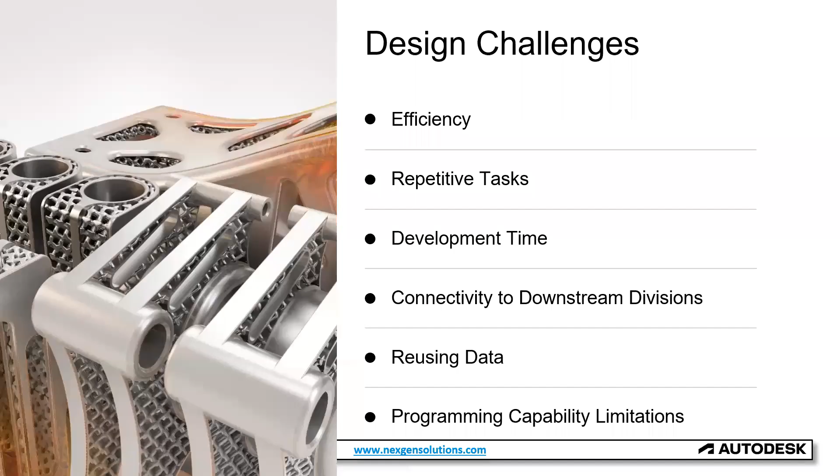Let's take a look at some of the design challenges we deal with in the engineering world. Efficiency is obviously a big one - how do we make our designs and get product to market faster?

There are always setbacks here and there. We might go down one path and decide that doesn't work, so let's try a different route. But there's a lot of inefficiencies in our workflow a lot of times, so we're going to try to get better at that.

We talk about repetitive tasks, things that maybe aren't time well spent by the engineers and designers. Usually they're fairly high paid positions, and we want that team working on things that are value added, not just these repetitive things.

So development time is always a challenge - again, getting product to market faster. A lot of these are kind of connected between efficiency and development time.

We kind of touch on the same types of areas there, but we're always looking to get our products designed faster and at higher quality in a quicker time.

Using tools in Inventor like FEA are always a great way to do that. Nastran is now built in, so we can rule out certain designs faster. There are a lot of tools in there that can help with that.

And iLogic is one of those tools we're going to take a look at here. We're going to do a little bit of demonstration on that as well, just here in a second.

Obviously connectivity to downstream divisions matters - we want transparency between sales and service. Not just on the design side, those different departments need to be able to communicate information back and forth.

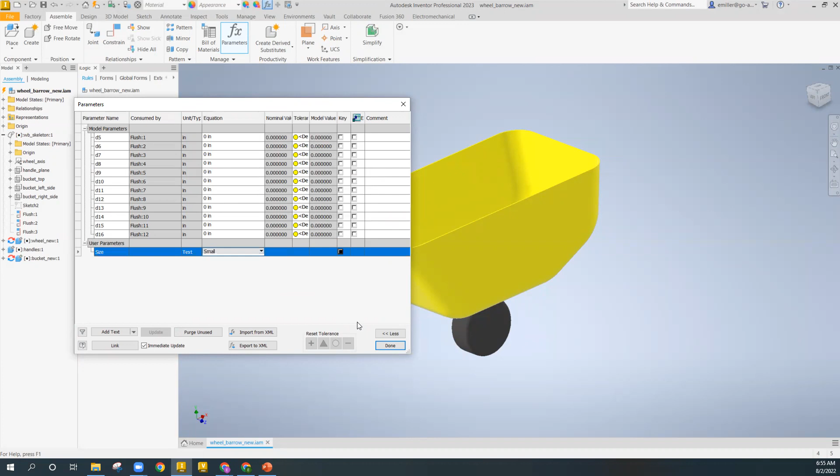Now we have that as a parameter that we can use to drive some dimensions. I'm going to close out of that, and I'm going to open up the skeleton now.

So we'll see, okay, what dimension or dimensions do we want to be driven by this. If I go now to the parameters here, we can see what the skeleton looks like. We've got some sketches, some planes, but you can kind of see the outline of what the wheelbarrow might look like, even though we don't have any geometry typically in a skeleton file. But one of the dimensions I'm going to be concerned about with these different sizes is this bucket, the dimension used to create the bucket top.

That's the top plane controlling the overall height of this thing. Obviously with dimensions in Inventor, we start at D0, go to D1, D2, D3, but you can change these. You don't have to leave them at those symbols, which don't make as much sense or have as much intelligence built in. So I'm just going to call this one height - it'll make it easier to see that dimension and know what it means. You can see it's starting at 36 inches right now. I'm going to hit done on that one.

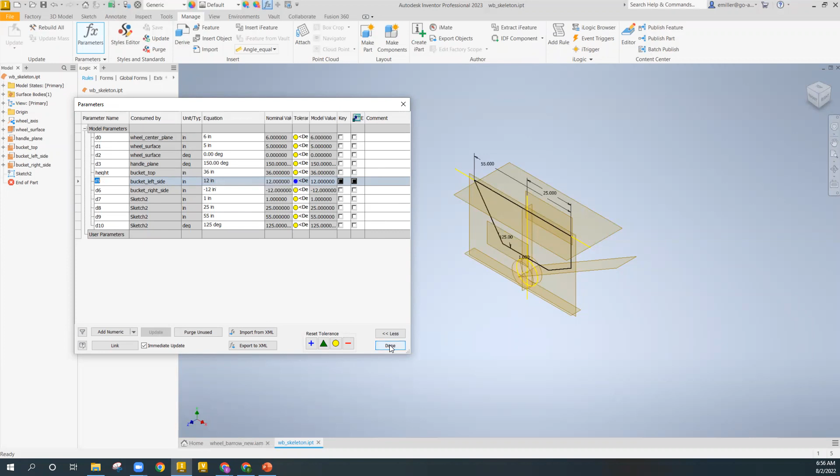So we want to make sure we pull that one in, or utilize that, in my iLogic design. I'm going to bounce back to the wheelbarrow overall assembly, and I'm on the iLogic rules side now. We're going to right-click in here and just start adding a rule to build this. So rule name - we're going to call this one change size and color.

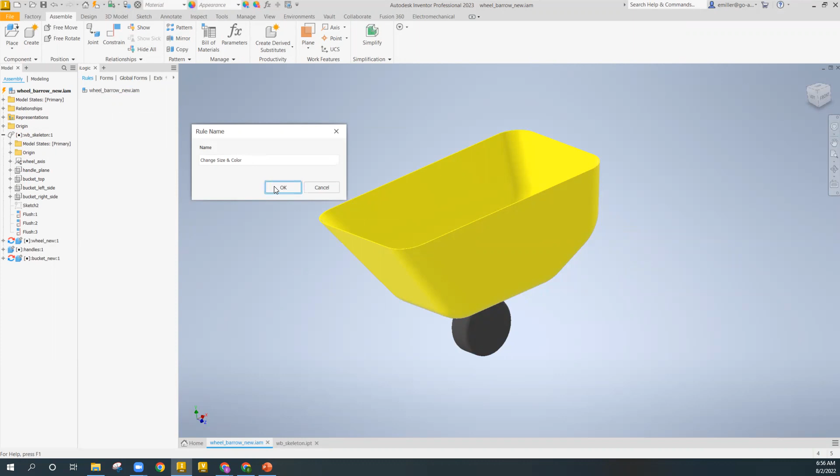So we're going to put both of these in. You could break this up into two different rules if you'd like. I'm going to put them both in the same one, again for the sake of simplicity here.

Okay, so we're waiting for that to pop up. Here's the interface for using iLogic. You can see on the left side we've got all these different properties, parameters, features, relationships, even some advanced API items down in the bottom. And then also we can create our own custom snippets as well.

We call these snippets over here. Basically the idea is we grab one of these, double-click on it, and it drops it over into the right, which is your area for code. Once you start building this, you'll realize it ends up being kind of code, but we don't really have to know where all the commas should go, things like that. There are definitely some things we have to be careful about, like when quotes are required, but compared to typing all this code out from scratch, it's way easier.

Anybody that's done some programming in the past knows if you have a comma in the wrong spot, a space in the wrong spot, it can cause lots of delays and you scratch your head wondering where the issue is. But it's a little bit better situation in here than trying to do that.

Up on the top, we can see that we've got a wheelbarrow new assembly. And if I scroll down, here's my three components, in addition to the skeleton. Expanding these out, we can see these are my model parameters. If I just scroll down a little bit, there's the height parameter.

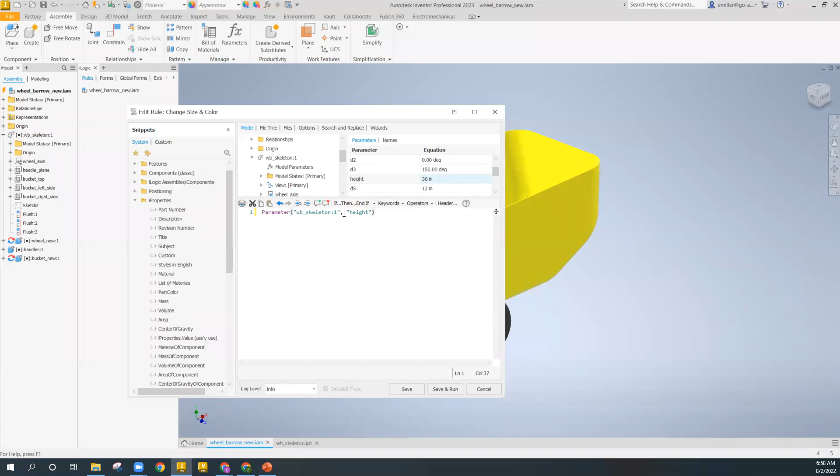So if I just double-click on that here, it just drops it in. As you can see, it's bringing in the parameter, with the parentheses in there to the appropriate component, and then which parameter it is - its height.

We can set that equal to something. I'm going to delete that out of there, but I just wanted to show that when you double click on it, it just drops the appropriate syntax down into the code area.

Down below that, there's some options too. We've got our if, then, end if, else if statements for adding conditional type statements. We've also got some keywords. One I like to use is case. When we use select case, it allows us to build these different options, so each case is a different option, and you can have that option, whether it be a parameter or dimension, drive other things based on each case. That's what we're going to use in the wheelbarrow project we're working on now. There's also a bunch of different operators and a few other options within that heading.

Okay, so let's start building this thing. The first thing is we're going to start with select case up on top, so I'm going to click that keyword. The case we're going to use is size, so let's go find our size parameter. If we go up here, that's under the wheelbarrow, that's a user parameter. I'm just going to double click on that - if you look at it, that's the small, large. So select case is going to be size. You're just saying what category we're going to start building these different cases with.

So I'm going to enter, and underneath that, now we're going to say what our case is going to be. Let's say this case equals, and this is one of those scenarios where we do want to use the quotes. I should mention too, capitalization is fairly important with these. If we're using parameters to drive things, make sure, in this case, I used a capital S for small, capital L for large - we want to make sure we put those in correctly. So it's case small initially.

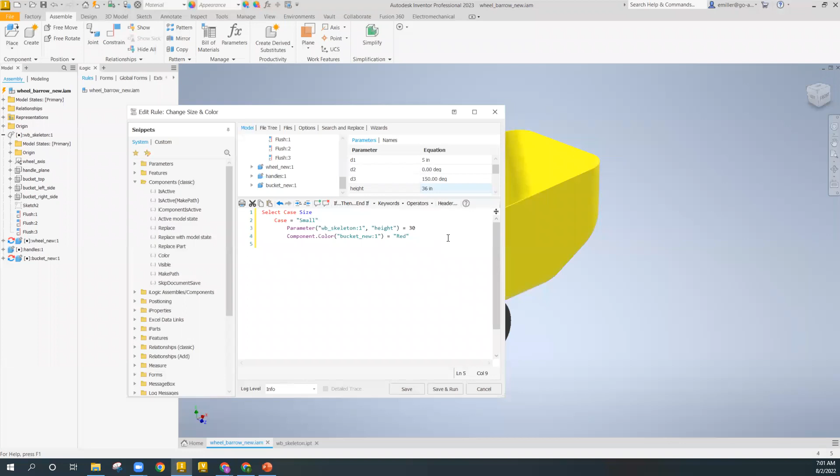All right, so we're going to duplicate the same thing. We can actually just copy those top three here. Let's copy those, come down, and we'll paste those in. Oh, I guess I should have went back one more level - there we go. So now case, and we'll just update this to what the large situation is going to be. We'll go case equals large. Then we want the height to be 40, and we want the color to be, let's say, green.

Now, one of the things - we could hit save and run here, but with the select case, it does have to end that argument, so we're going to hit enter. This is one of those things you don't have to always remember. If you try to save and run - let me just do it once here - save and run, it just tells us that select case must end with the matching end select.

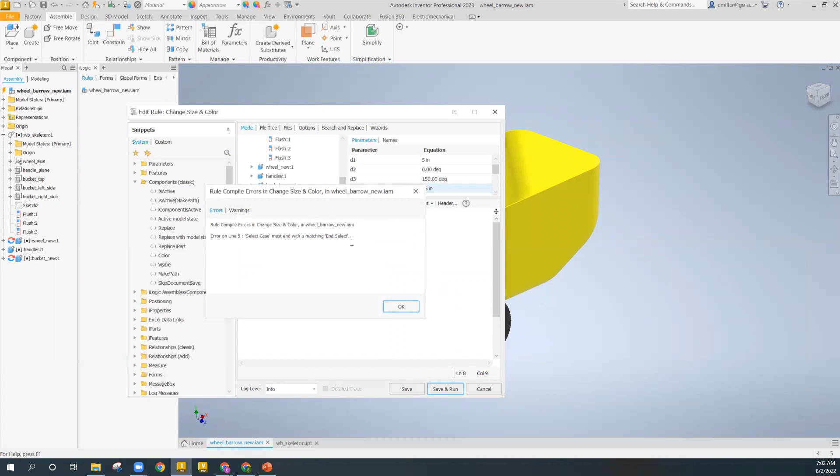So again, it's not something we always have to remember - it'll tell us if there's an issue. So at the bottom of that, we enter 'end select,' that's in the keywords. Indenting like that helps organize your arguments a little bit. You don't always have to do that, but I like it so it looks more like paragraph form.

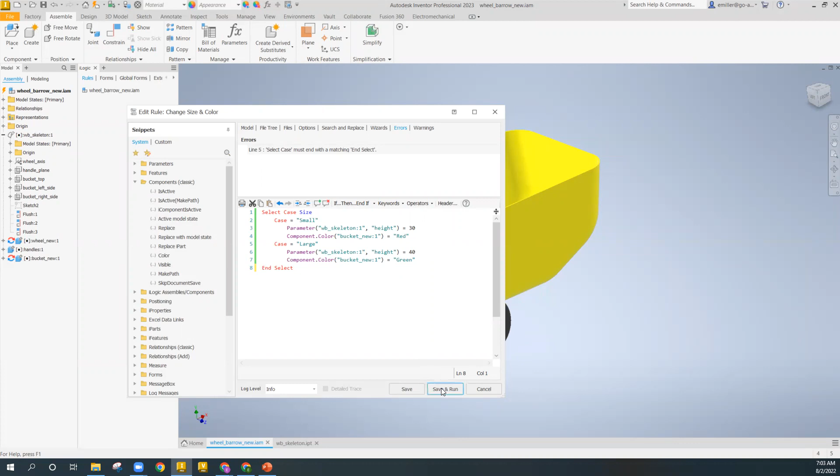Now let's go save and run. And there we go, it updated it. Notice the orange lightning bolt is up there - it still needs to update the dimension, so I'm just going to hit that. And now it went to our smaller, shorter wheelbarrow.

We can test this out by going to the parameters here and going from small to large. And now it's updating - I'm a little surprised I got this to work the first time. I'm not a coder, but hopefully this shows how utilizing iLogic can be fairly straightforward, using language that designers and engineers are used to.

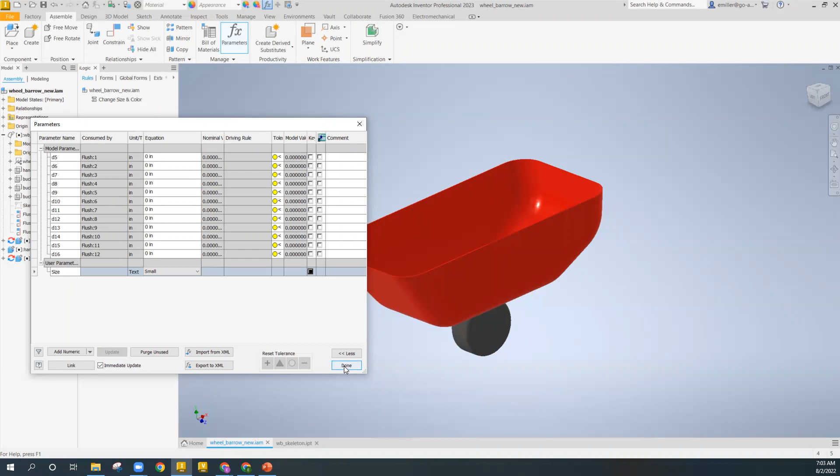All right, the last thing I want to show you, or maybe not the last thing, is how to build a form to drive these. So let's go to the form side. We'll go to add form.

Okay, so we got our form editor, and you can see the form build over here on the right as you start to develop these. I'm going to change the name of the form - we'll click on the label here and call this 'change wheelbarrow size.' If I click off that, you can see I changed the name of my form over here.

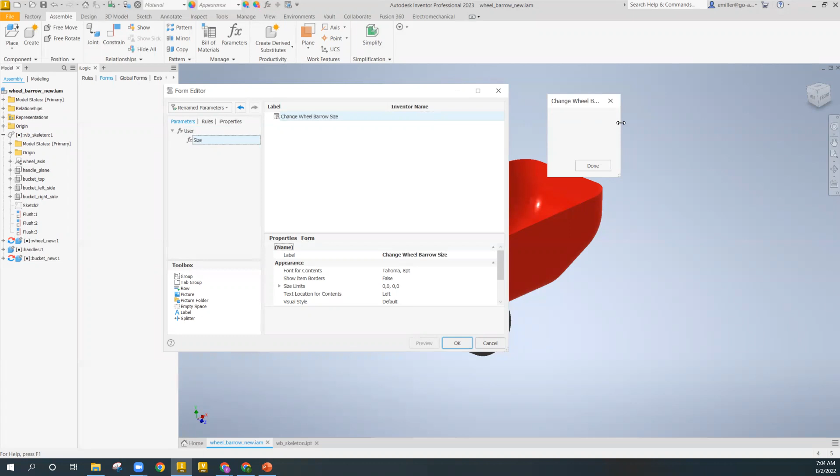We can see different parameters, rules, and iProperties that we can drag over and add to the form. I'm just going to drag this size parameter over, and we can give it a different name, because technically we're only changing the bucket size. So I'll go 'bucket size' there. If you click off that, you can see the build - on our form now we can see it's small or large. So let's hit OK here.

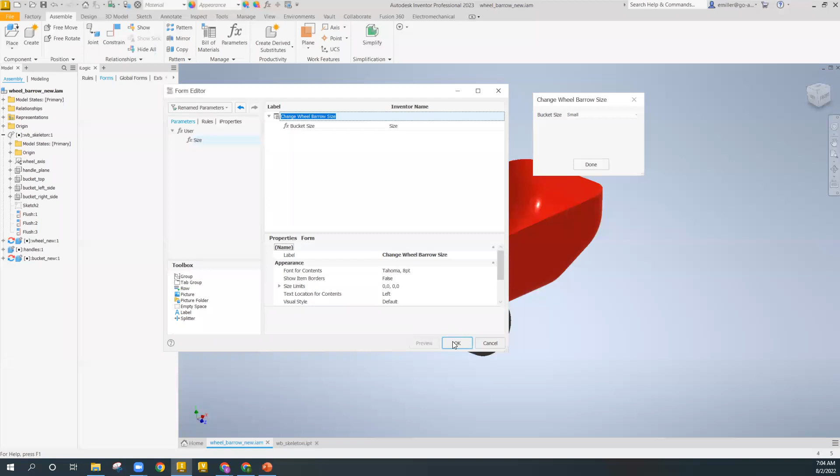Again, this is pretty simple, but you can build some complex forms with all the different information available there. So now if I click on my form, 'change wheelbarrow size,' we'll change bucket size to large, and we can use this to control the shape and the color of our bucket.

The nice thing about building forms and iLogic rules is that we can take this to the next level. Not only on the design side can this be utilized to make these different options faster, but we can also extend it off to, say, sales.

One of the tools that's out there now - you may have heard of Configurator 360 in the past, that's getting phased out. Autodesk is focusing now on the Forge development platform, which is a cloud-based development tool. With Forge, we can create a design automation configurator for Inventor assemblies using iLogic.

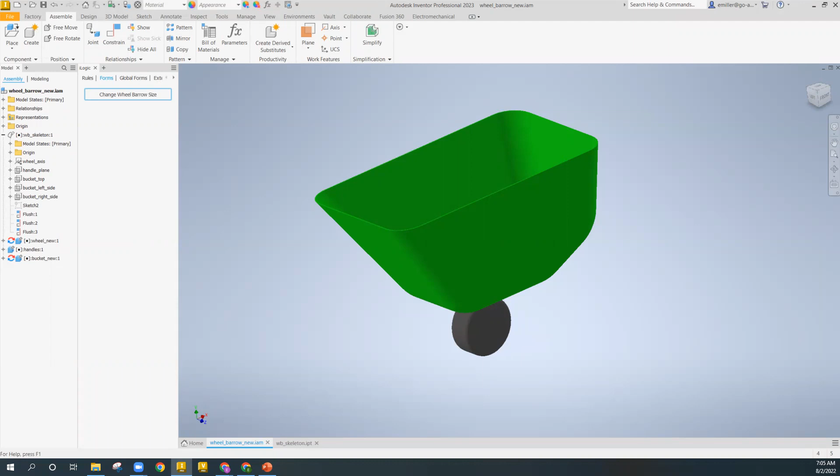It doesn't have to be an assembly - I guess it can be a part and drawings as well. So let me pop that open quick so you can see what this might look like.

So here is the site - there's a demo site out there for this. Anybody can go check it out and test this out. It's Inventor config demo autodesk.io. There's just a couple projects out here, but you can actually go get the code for this and build it on your own local workstation and test it out with your own projects. So that's the cool thing now - this code is available to anybody.

You do need a Forge account, so there's cloud credits that get utilized to build these models, but it's pretty inexpensive if you ask me - I think it's definitely worth the try, and worth looking into. I think if you can get this in front of a customer to show a web-based configurator like this, you can really turn some heads and build more sales.

All right, so let's just go through what this is - this is basically pulling in the different parameters that we want in iLogic.

So we're driving the size and this wheel. We've got the wheel size, number of spokes, you can have slots in the spokes if you want, different wheel finish, brake material. But you just look at it, and actually the total price is generated from these other options. That just kind of kicks out what the price is going to be. So just think about having that in front of a customer.

They can see the price right away. Obviously, it's kind of like some of those websites where you can go build a car or build a pontoon, and it shows you what it costs. So this is kind of the same type of approach you can use with your own products within Inventor.

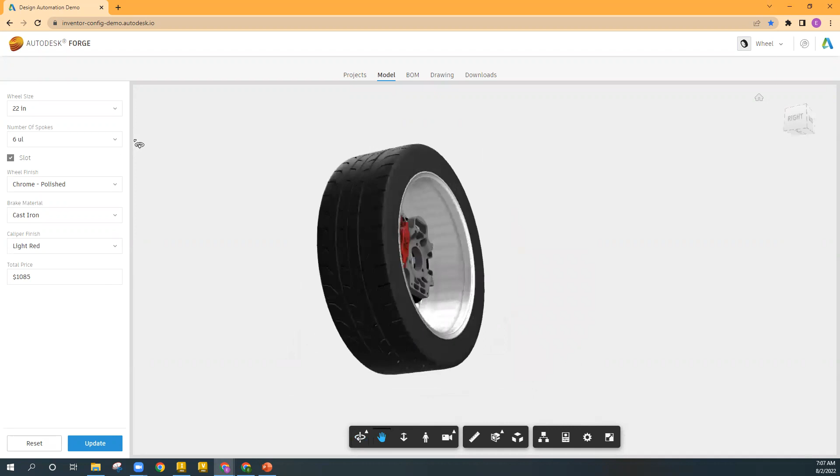Now the outputs you can see up on top, we can look at different models. We can actually rotate this thing around, take a look at it, explode the view, things like that. So this is kind of that cloud-based viewer that's being utilized now in a lot of different areas within Autodesk tools. We can look at bill of material, drawings, and then download the actual part files, create quotes, things like that. So it's pretty neat.

Let's just look at what it takes. Now some of these, obviously, if they're complex assemblies, it utilizes the cloud environment from Autodesk in order to build these — the Forge tool does. So some of these, if there's a lot of significant changes, it might take several seconds up to potentially minutes in order to generate. But I still think the value is there by far.

So let's just make a couple changes. I'll do a wheel size of 19. Let's say we want 8 spokes. Let's change this over to aluminum polished, and maybe we change the color here to a smooth red instead of a light red. Okay, and I'll hit update.

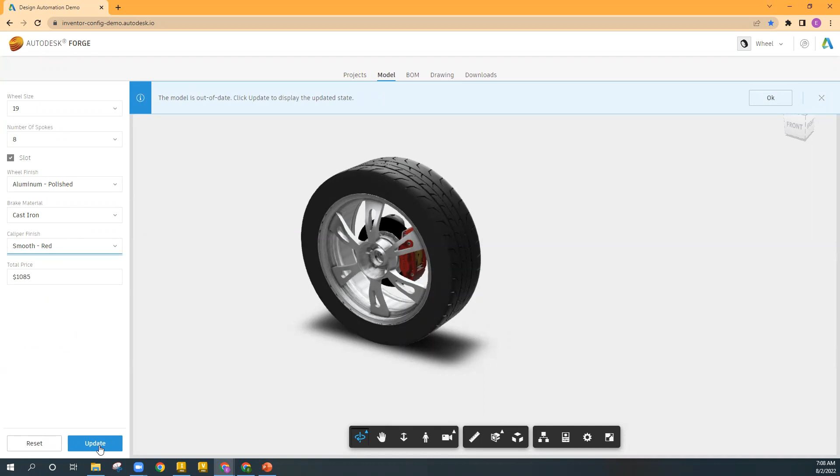So this takes just a little bit of time to generate the results here. It's got to go through and build using the cloud server. So if you think about it, you can actually do a ton of these at once — it's not utilizing your own computer horsepower, it's using all the cloud servers that are required. So it's nice to be able to think about doing multiple different configurations at the same time if you open up several of these sites. So it can definitely help with the sales process.

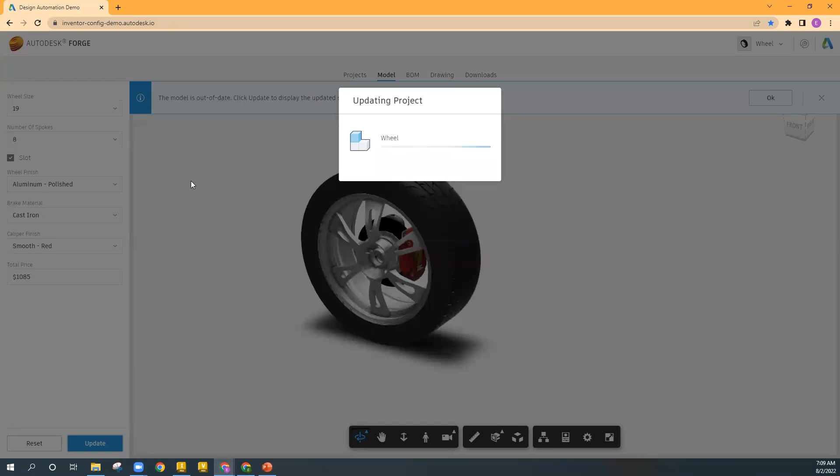And again, some of these take a little bit of time. I know if you do one of them, it'll actually cache it, so you can bring it back faster next time. I must have picked a configuration I haven't tried before, so that's why it took a little bit longer to develop. But there it did finish — notice here it said overall it was 43 seconds. Not terrible, might have seemed like it, but that gives you some time to get to know the customer if you're in front of them.

Notice the number of credits it took here was 0.0724, so that basically took 7 cents in order to build this thing. Pretty awesome as far as the overall cost to you. And if you do a handful of these configurations, it's still under a quarter, under 25 cents basically.

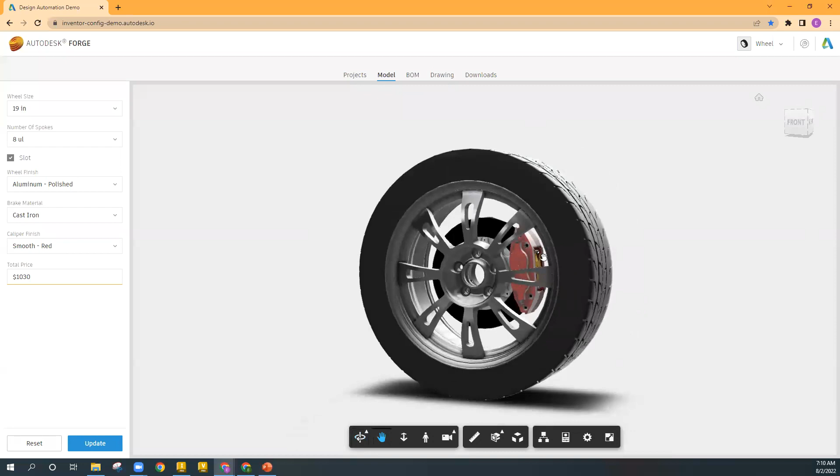So let's hit OK on this, and we can kind of see now — there's my 8 spokes. Okay, we've got the slot in there still, just a little bit different color red, probably not that much different. We can look around, see the back, and again we can explode these out. We can take measurements within here, but it's just nice to be able to show all these different components to a customer, and I think it's a pretty good wow factor sometimes when you're dealing with these. You've got the view cube up in the upper right.

So wanted to kind of highlight that. In order to utilize this tool, you do have to use Inventor, but the code is out there for this, so you don't need to be a programmer — there's no extra coding required in order to get this working for you. You just have to set up a Forge account and utilize that in order to start taking advantage of this. You can see the price updated over here too — it was 1085, now it's down to 1030.